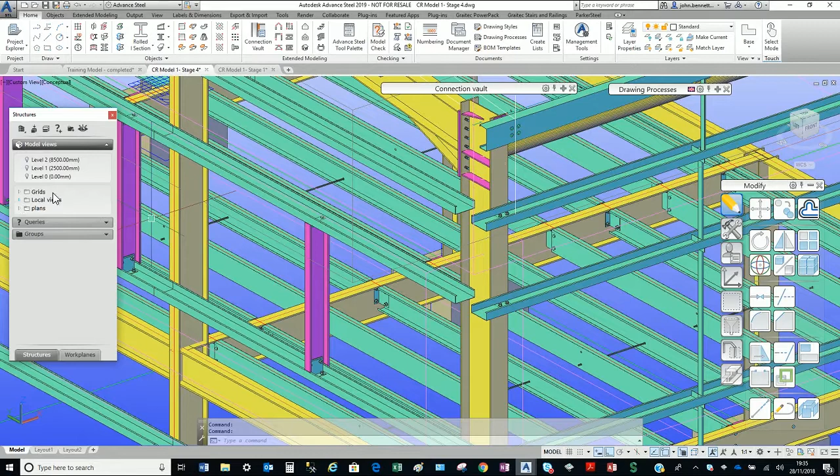The initial one is, we can put everything in, so you can basically draw a model in Advance Steel, and then use the standard tools to place purlins and rails. So you can use the tool I've just selected, which is the purlin tool, and you can go along and select what you need to put in the various elements.

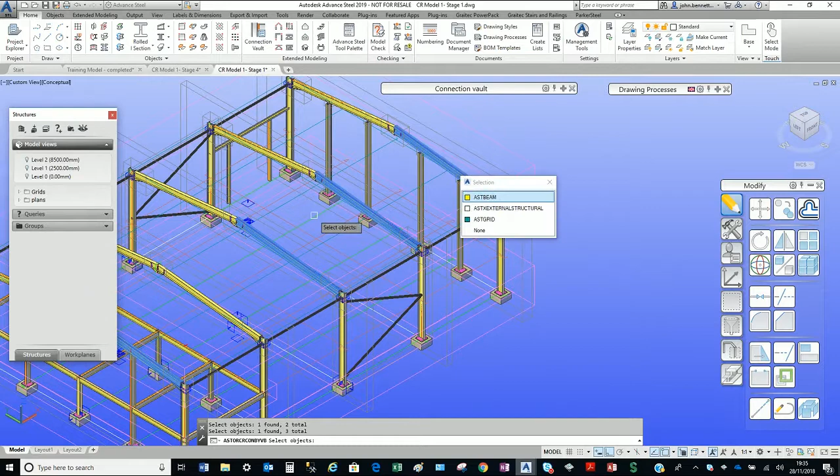We've actually added the Thomas panel section into here, and on my system I've created a library entry to add this in. So what this does, this will change this to have the Thomas panels, and they're added into the system so you can see them here.

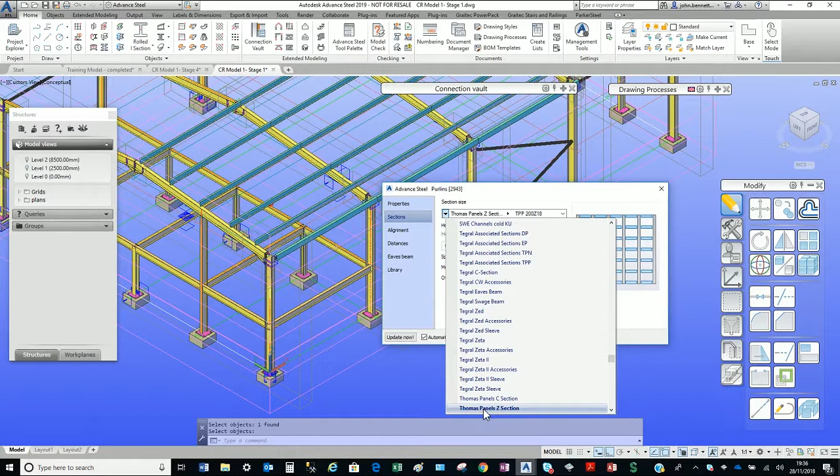You have the full range depending on which section you pick, and depending on where you want to apply them, obviously on the roof or the side. You can use the same macro to apply them to the side of the building. You just need to pick how many bays you want to go along in the building. I'm picking all of the columns here.

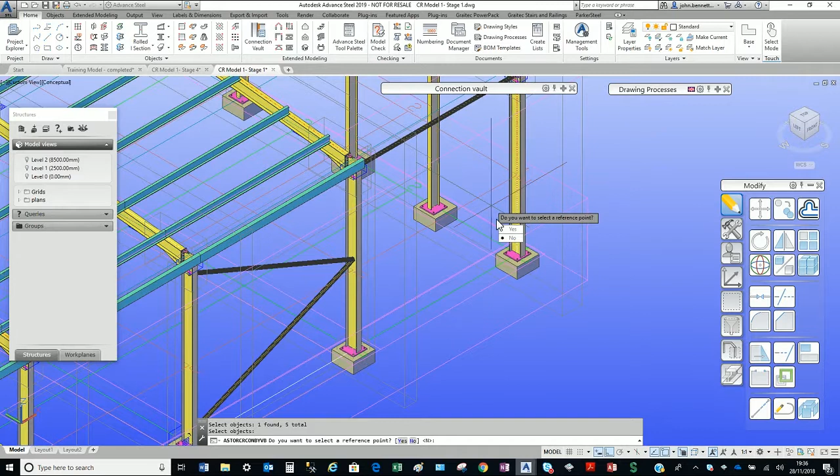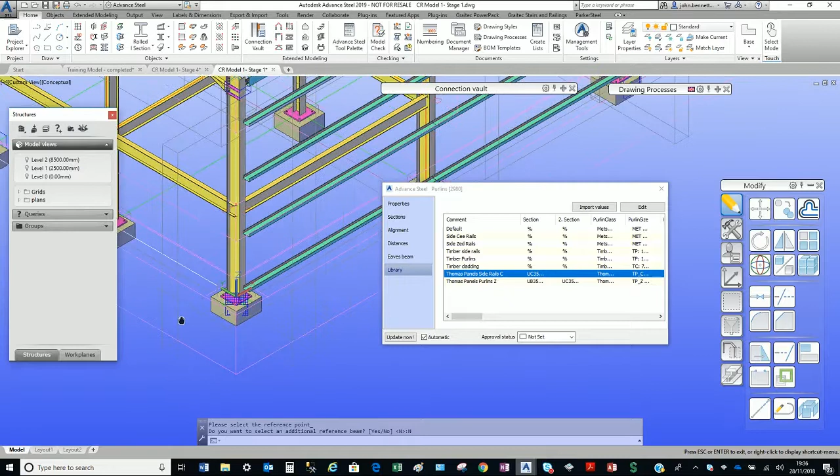Another little tip there as well, we use this all the time: if you use the reference point at the bottom, you can change it so it sets the rails out from the bottom. Again, we tend to create some library entries - we normally teach this on our cold roll training course. So here the rails will go in and be set out from the bottom. Again, it's just a start point really - you can go in and adjust all this, but the important thing is that these have been added into this macro.

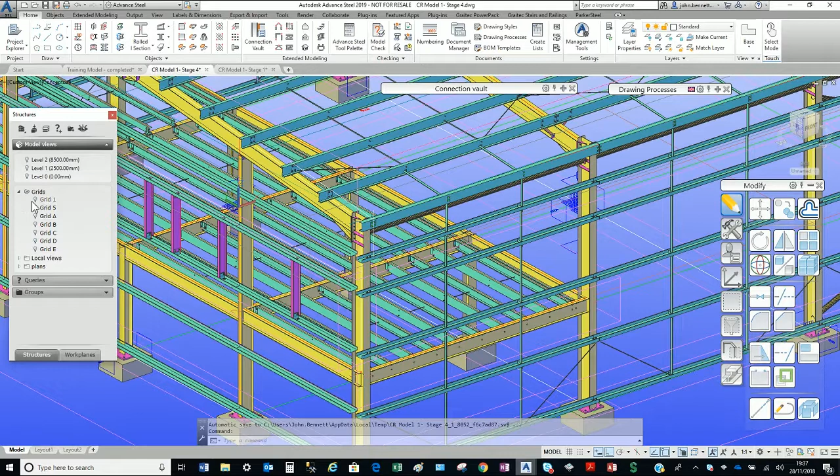So some of the other elements that we led into that was to do the various joints, etc. Here, if we limit the view of the model, you can see that we've got a series of joints applied on the column here. This is the standard Advance Steel single purlin plate joint, which is applied.

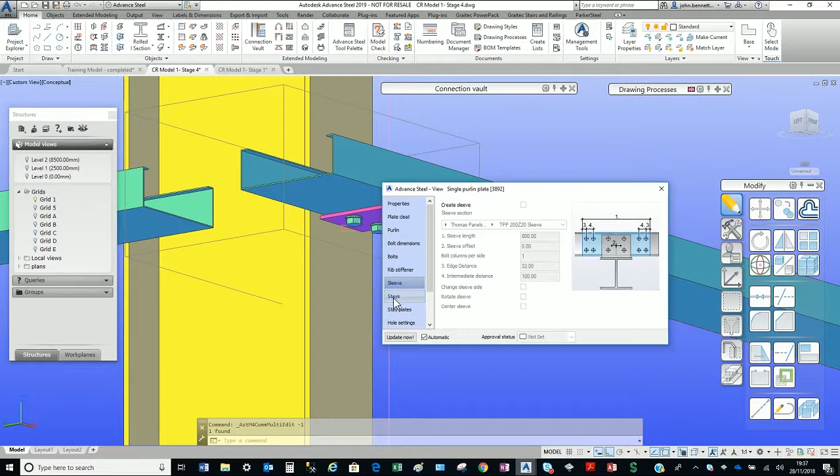So all the parameters when you apply this joint actually come in automatically - you shouldn't need to add anything unless you just turn bits and pieces on. So if you want stays and sleeves etc., you can turn them on. That's also working with the master-slave relationship as well - joint, so parent-child, sometimes it's called.

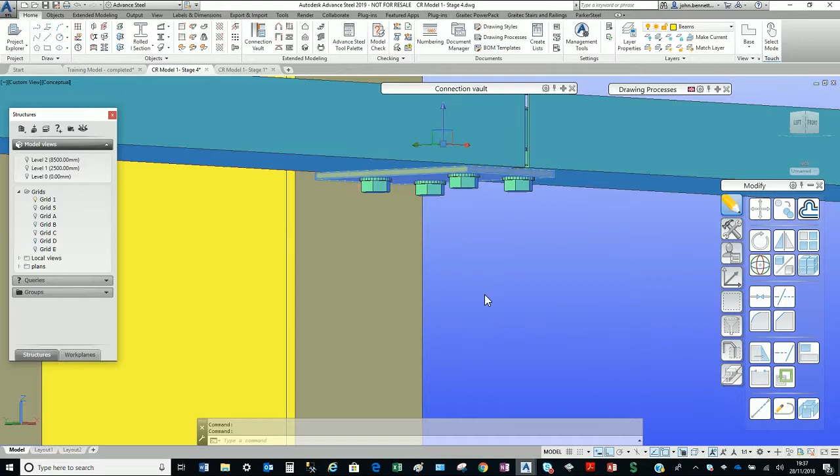And similarly here, we can do this one here as well. This is actually using a custom cleat connection as well - we put that in as well as an option. This actually uses the profile for a weld-on cleat. So that can be applied as well under initial joint selection - you get a drop down here.

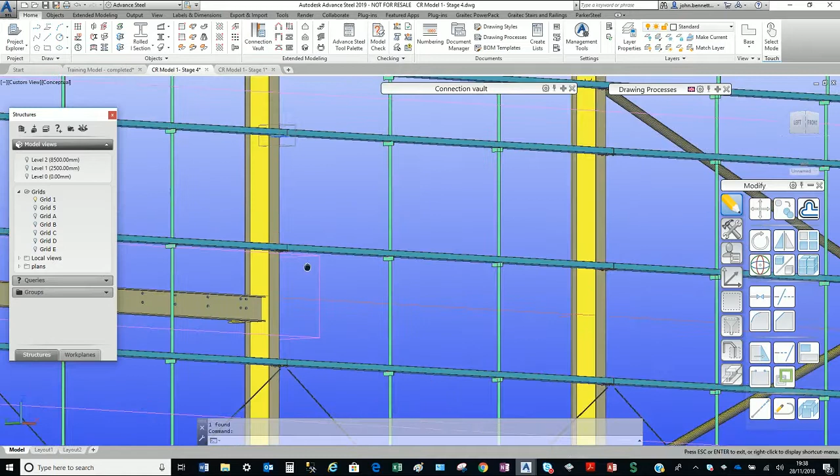So we added various elements into the model. If you want to use a standard plate joint, you can use this one, which is actually accessed using the same way.

So here it just puts on a plate, so it's made from plate instead of a profile. It's in the same group of joints here.

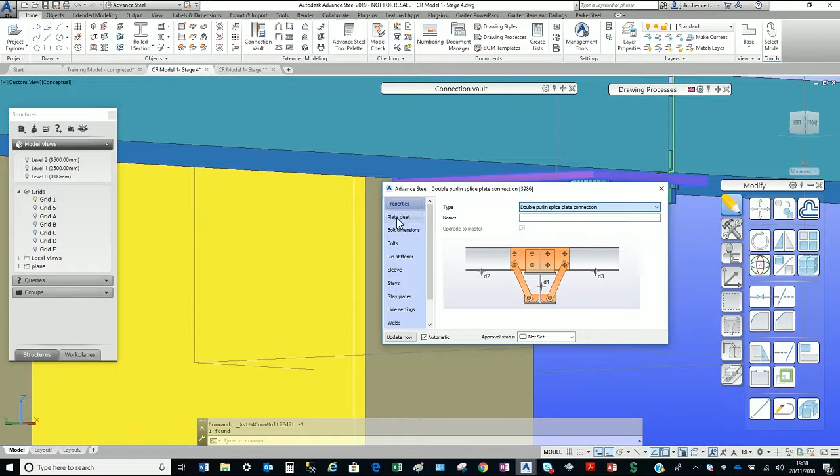Again, all the other parameters should be available, and you can come in and change them if you want, but you probably shouldn't need to. Everything should be set. Obviously, if you want to put a sleeve on, you would select it, and it should be preset to pull up the correct sleeve when you pull it in, and likewise with the stays, when you activate them, they should turn on as well.

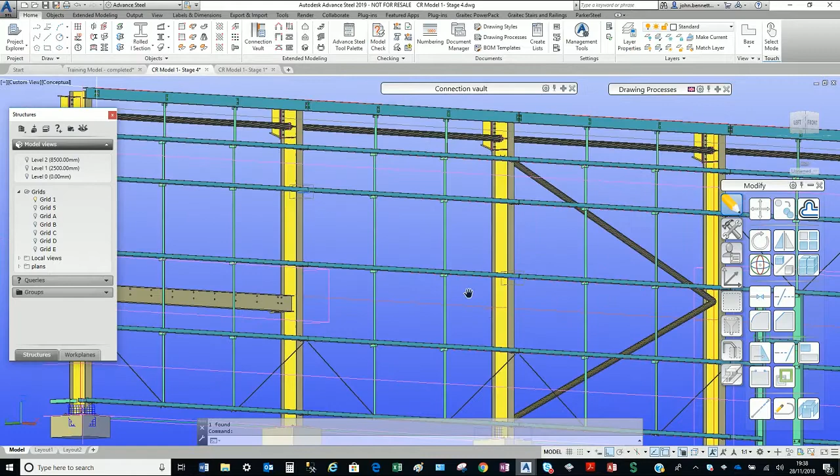So you have single and double purlin joints. There's obviously eaves joint details as well, so you can see that at the head of the column here. We've put something in as the standard joint that's available in Advance Steel.

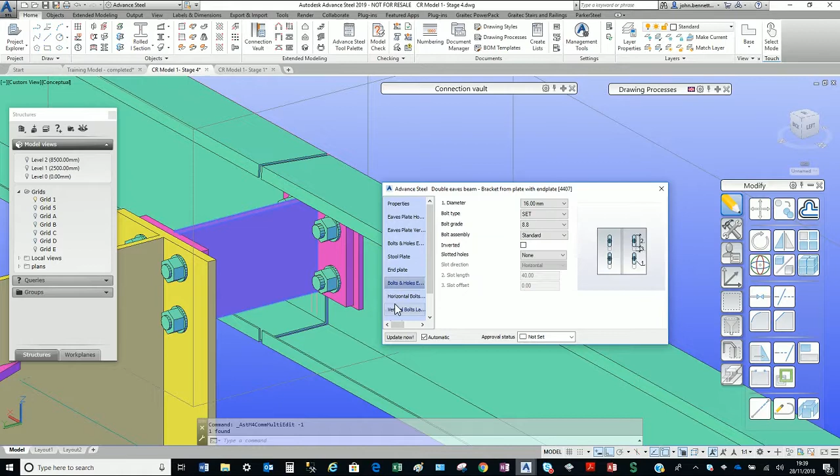Again, all the parameters should just come in by selecting the sections and following the prompts. You shouldn't need to do anything, it should all be pre-configured. The other, obviously, there's a single version of that as well, which is available on the end.

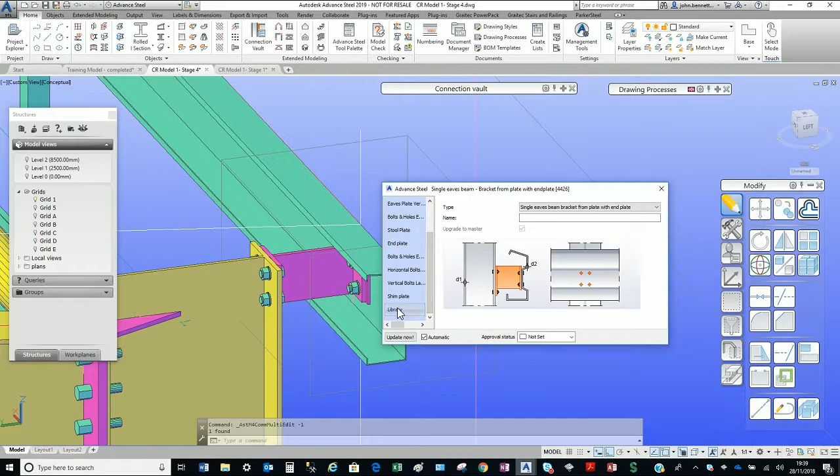So just to show that one quickly, they all fundamentally work the same. You just need to obviously configure what you want. The extra bits are not in there, but everything should be in the library, in the table for you to access, and it should automatically assign.

Some of the other elements that we did add in to sort of stick with joints is there's these kind of things here. This is the trimmer joints. So you can see I've created some model views.

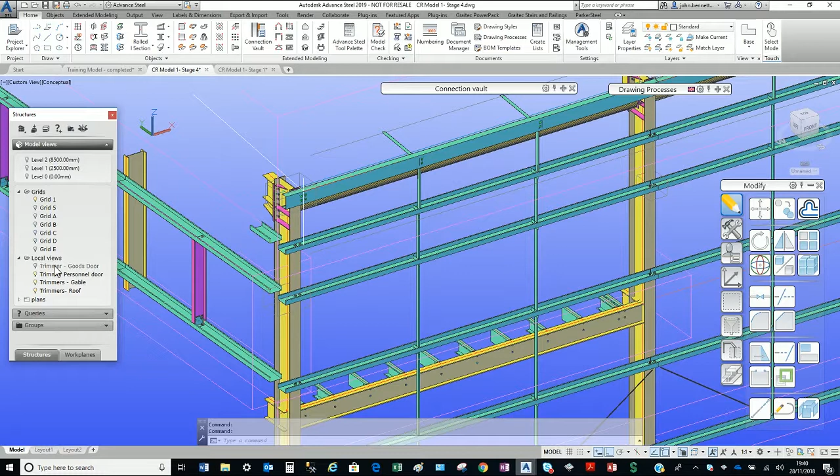So within the model, there's a series of views here, so you can put trimmers in. These are localized sections, and there is a trimmer joint entry available for the roof, or on the side, using the same joint.

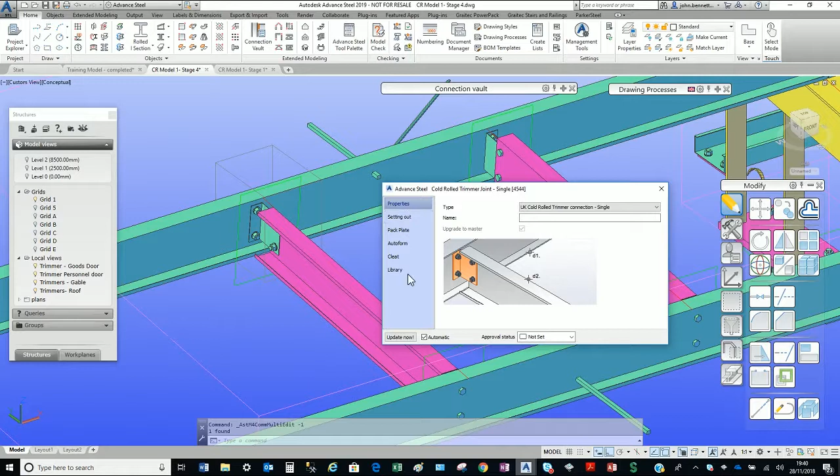So we've added, again, the library entries, it's all pre-automated, it should just put it in. You just need to select the sections. So you can put trimmers in the roof.

Obviously, you can put window trimmers in here. You get short and obviously long cleat options there. You can see the short cleat at the top here. Okay, and packer plate options as well, and obviously countersunk bolts.

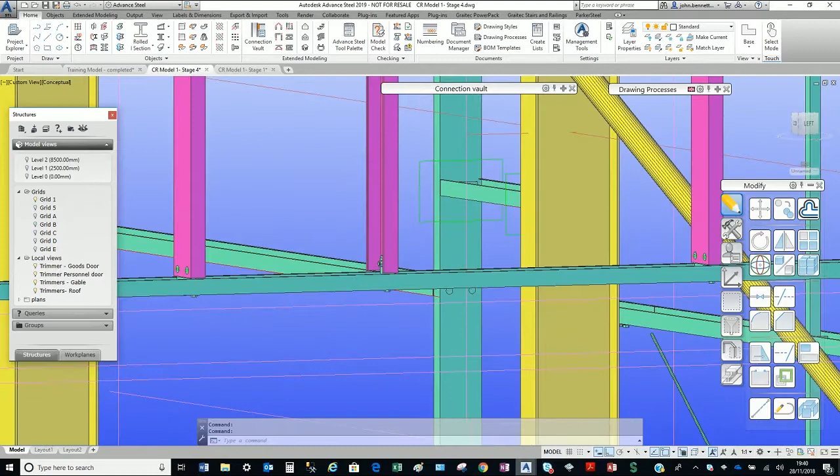So at the top and bottom, and this can be used in different configurations in the system. So you can do personnel doors around here using the same combination, and even the header to the door.

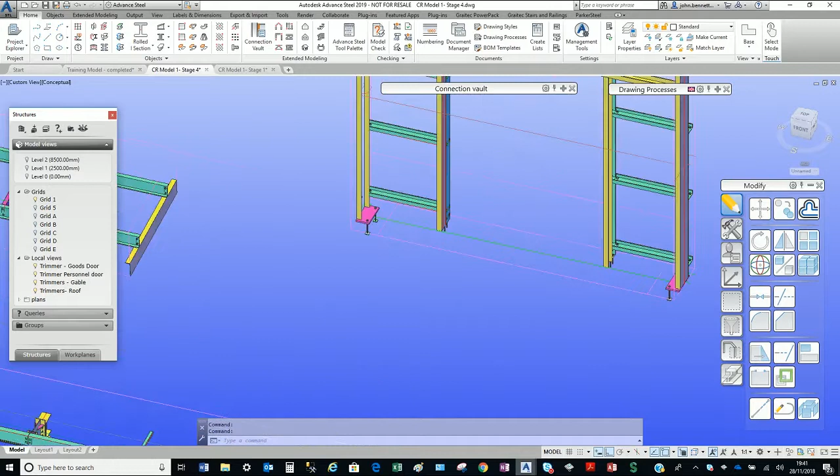So this is a short cleat option, again with a packer plate. I showed it being used up in the roof for a couple of roof light trimmers, and you can even use it in the context of a roller shutter door with some hot rolled framing behind it to form the cold rolled framing. And there is a trimmer base joint detail as well.

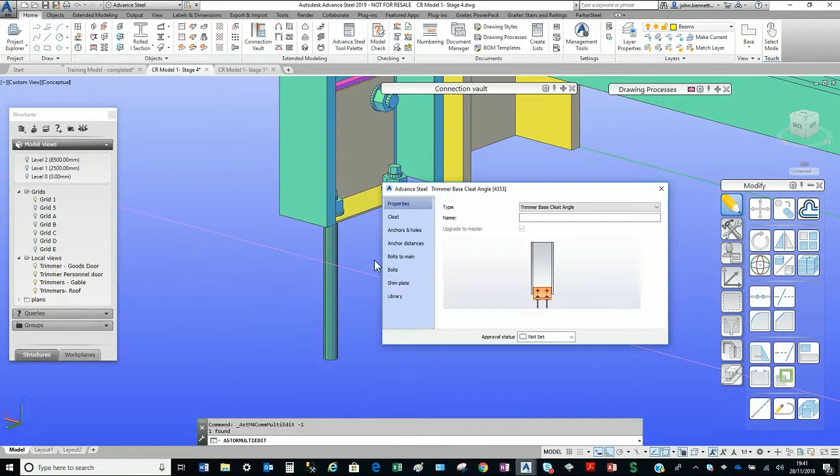There's a couple of options for those. There's a newer type which we actually added the entries into. So you should find it should just pull the cleat in, and obviously we've set it up to use that.

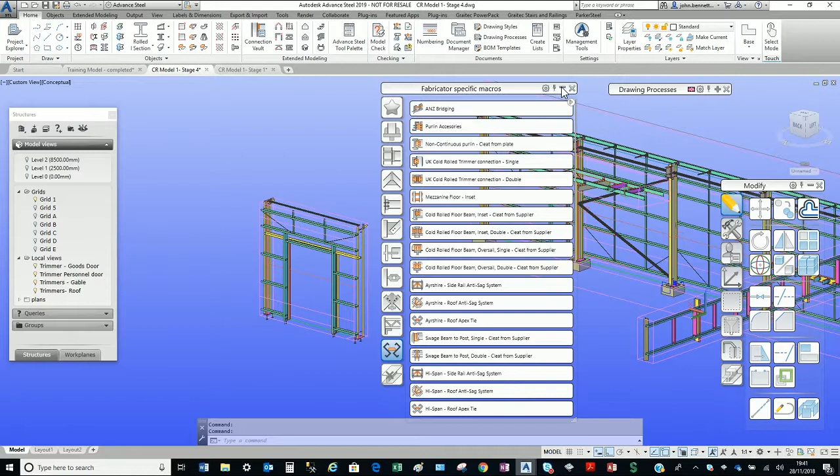All these localized joints are found under the connection vault. Obviously I've just stuck a bunch of them on my favorites tab here just to show them today, but it uses a combination of the purlins cold rolled and the fabricator specific macros as well. The fabricator specific macros is where you find the trimmer joints, and also the ones to do with mezzanine floors.

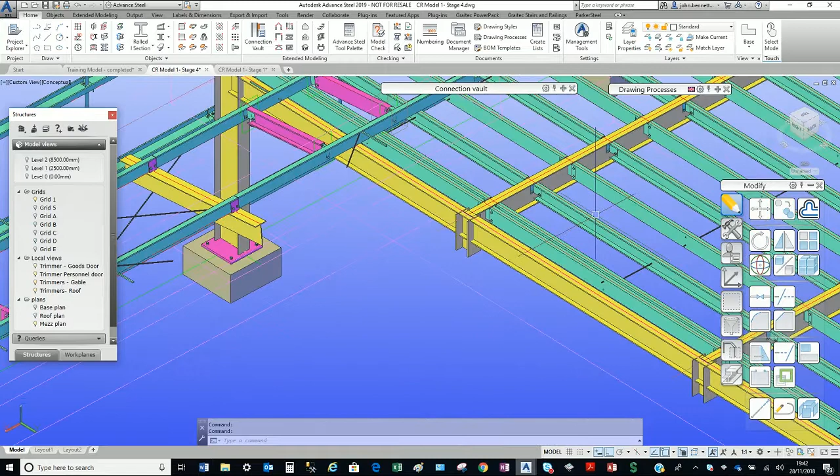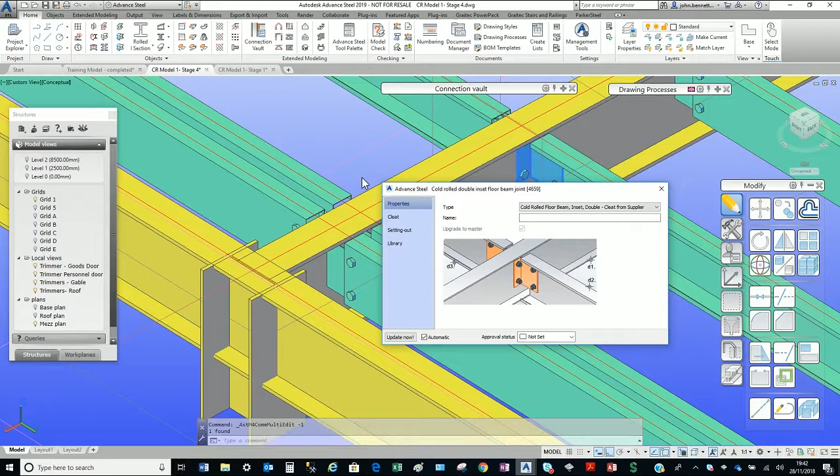So that's the primary placement, and then there's single and double mezzanine floor inset beam joints as well. So it's all standard operation, you shouldn't need to change anything, it should just come in with a standard cleat.

We do also have some oversail options if you have a different mezzanine floor where it's actually sitting above the top of the steel. There are cleat options for those, and they again are using a standard joint.

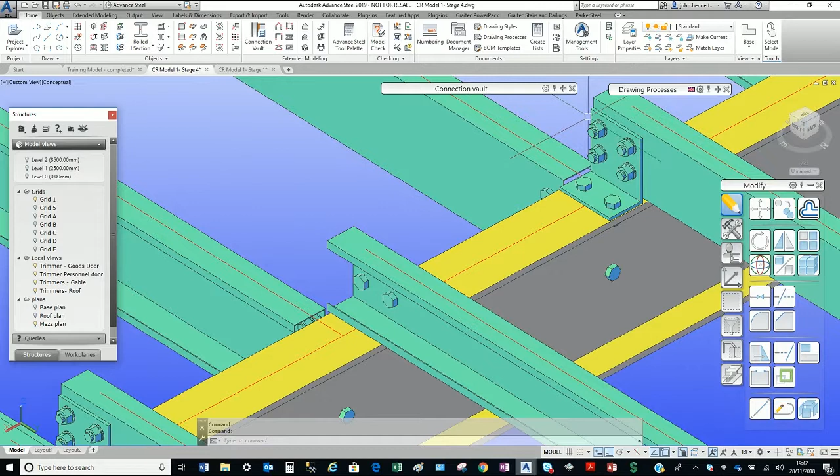Okay, we've used the cold roll down. We put the standard cleat in, which is the bolt-on cleat arrangement. These are all Autodesk Advance Steel macros. There's no special macros for the primary input. All we've done is populated and added the profiles and data for the joints into the system.

The final aspect is to look at the anti-sag restraint systems. You'll see that there are struts here. This is being put in with a macro, and the data is being generated as soon as you select the options for this.

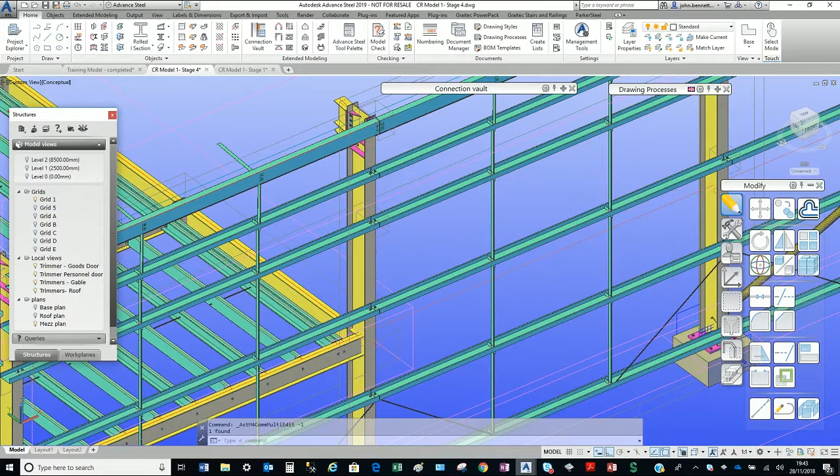It should put in a strut system on the side. We've put it into the side rail anti-sag. Everything should be pre-configured, so you shouldn't need to go in and alter anything. It should automatically put them in. You can change the set out if you want, and untick this to make it available so you can move them around. You might need to tweak the tie wires a bit.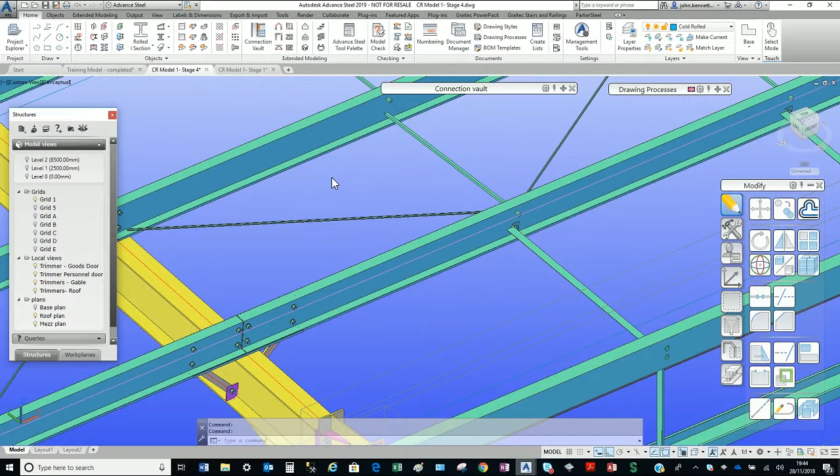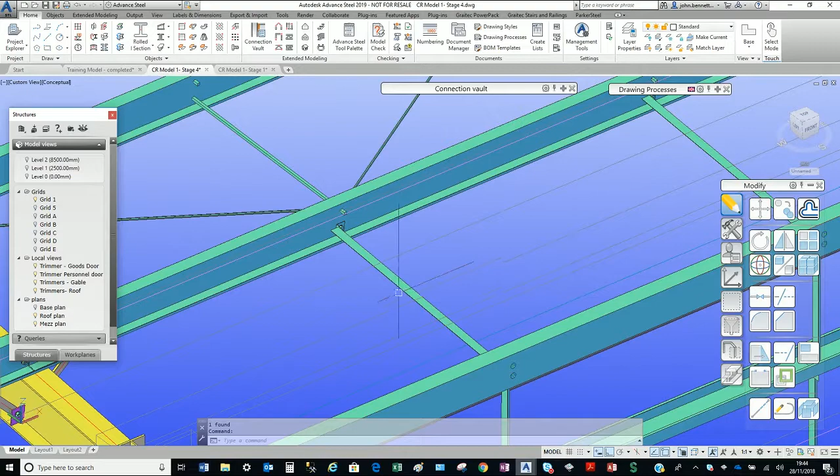Similarly, at the roof level, we've done the restraint system in the roof. We've used a macro for this as well, a separate one in Advance Steel, the roof sag rod and tube macro. Everything should come in pre-configured to work with the section sizes and place in the basic parameters you need.

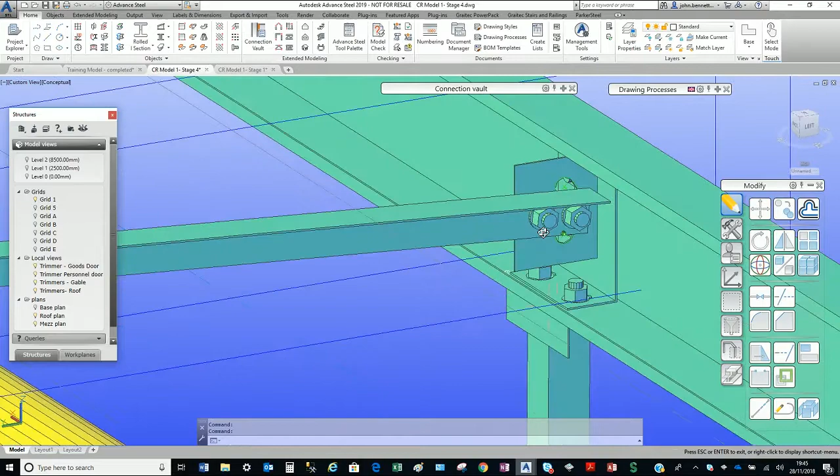We did some slightly different things for people. These are actually a custom connection. We created this custom connection to put this element in and make sure the alignment was correct between the two systems. Thomas had a particularly different way of doing their slotted cleat arrangement, so we had to work something out to get that to come in right.

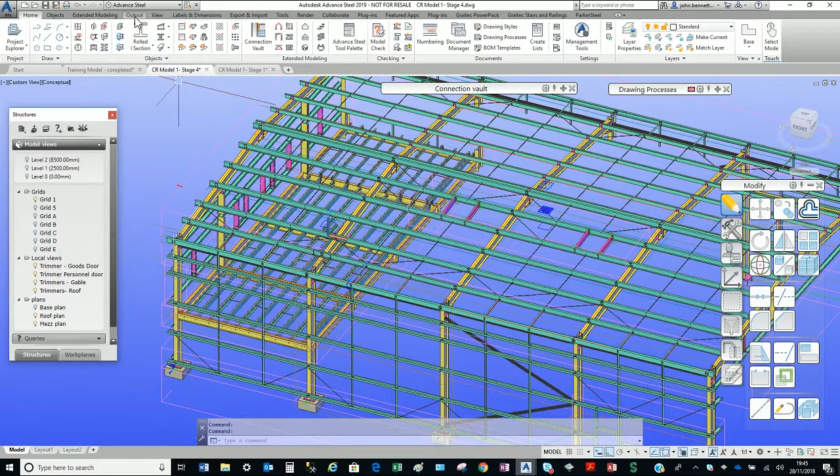That was a little bit tricky. It wasn't actually in a standard macro in Advance Steel, so that option wasn't available. So we got around the problem and created a custom connection. Those are stored in the system, so if people want to use those, they can access them quite quickly.

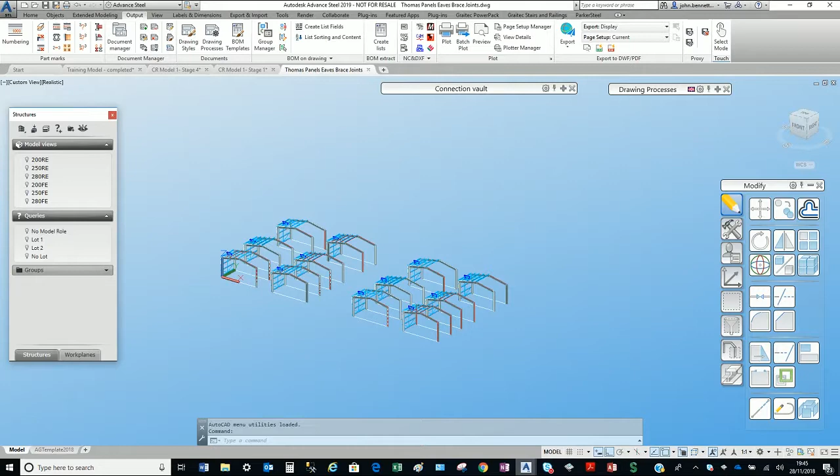Just to show you where they are - connection templates, these are the ones here. If you open them, you'll see the custom connection templates have been added in here. So we have a series of templates available for each section size.

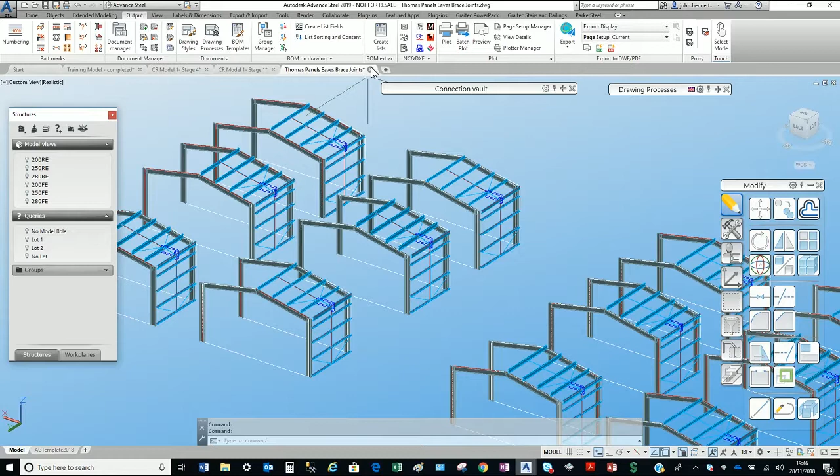Once you put it in, you only need to put it in once. You can copy it and adjust it inside the model if you need to. So it's quite flexible, and it gives the exact cleat arrangement required by Thomas panels.

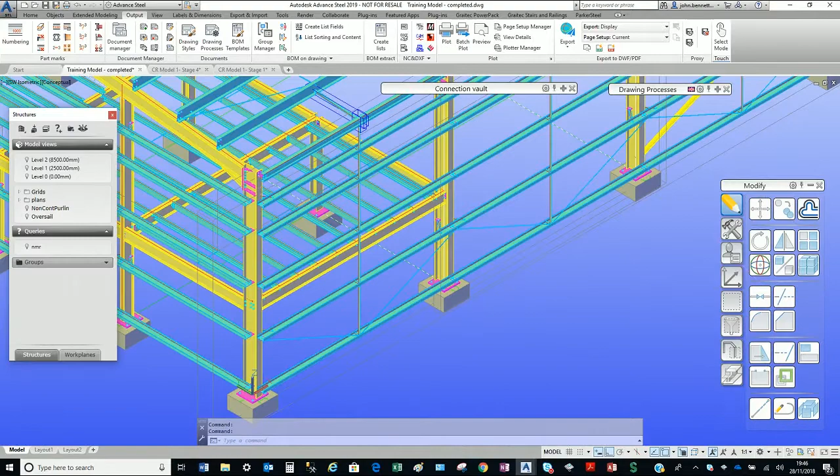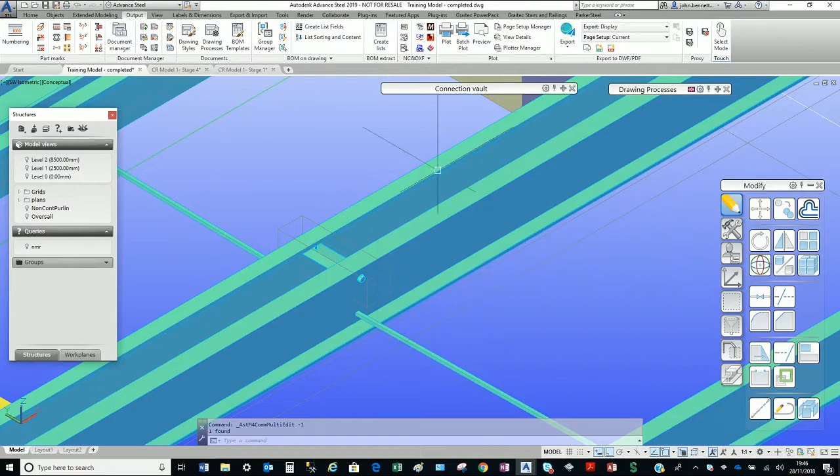So that's all the primary aspects. The final one is the apex tie, which I just showed in this model. I didn't have it in the other model, but we worked with them to complete the roof system - this is the apex tie macro. It's been configured to suit Thomas panels' request. This is the strut type, and there's also a rod type that can be used.

These joints are available - you can add them to your favorites tab, but fundamentally we're using the ones on the system down here. So roof anti-sag, the rod and tube, the side anti-sag, and the apex ties are down here.

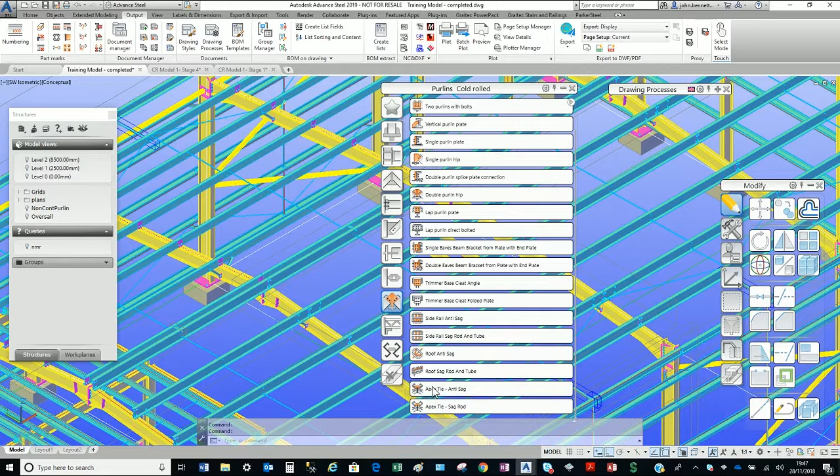We also did a dedicated drawing process for Thomas Panels. If you want to create a drawing, you just press it and it will do every drawing in the model - it will do every element for them.

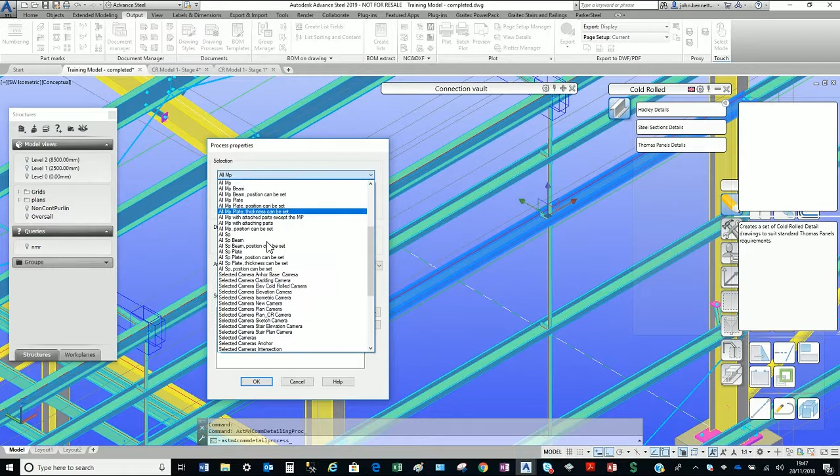It brings up a dialog. I obviously don't want to run every one, so I can override it and just do selected and let it run.

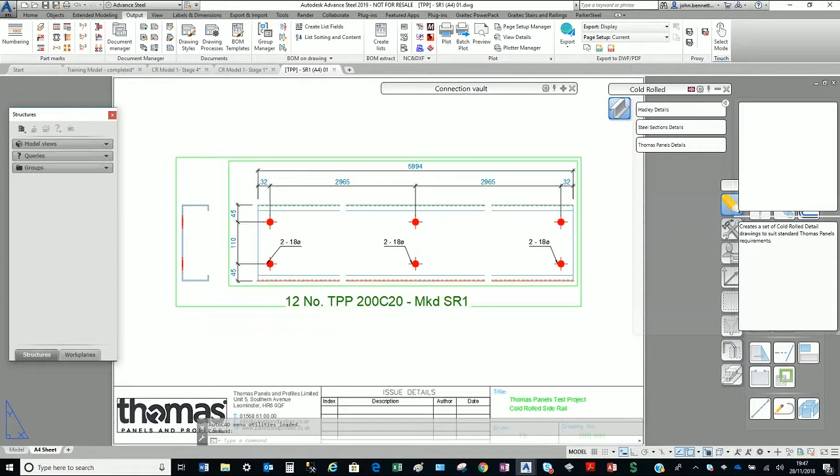So that is the drawing that's been created. We've tried to create a template layout to follow, and it should give enough information to go to them for processing, running every single part that's required from the system.

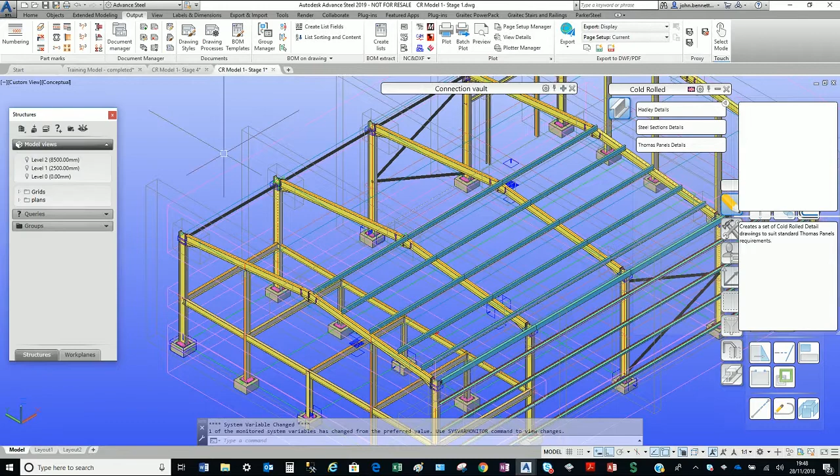So that was a very quick insight. Obviously there's a lot more involved than what's going on in the background, but that gives an overview of what we've covered in this update for 2019 R2, working closely with Thomas Panels to achieve that.

Hopefully you find that interesting and a good insight. If you reach out to them, I'm sure they can give you more information, and if you're stuck and want support, you can speak to the guys in support and they should be able to help you. Thank you.